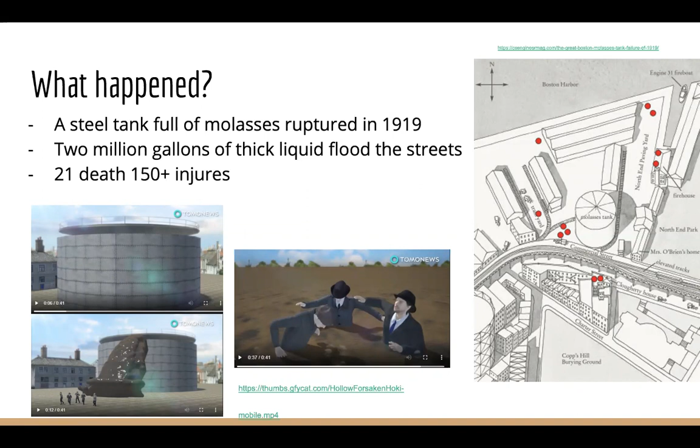Hi, I'm Nishikeet. Our group is covering the case of the disaster that took place in 1919 Boston. A giant tank filled with molasses burst open and more than 2 million gallons of thick liquid poured out like a tsunami. It flooded the streets, crushed buildings, and ended up killing 21 people and injuring 150 more.

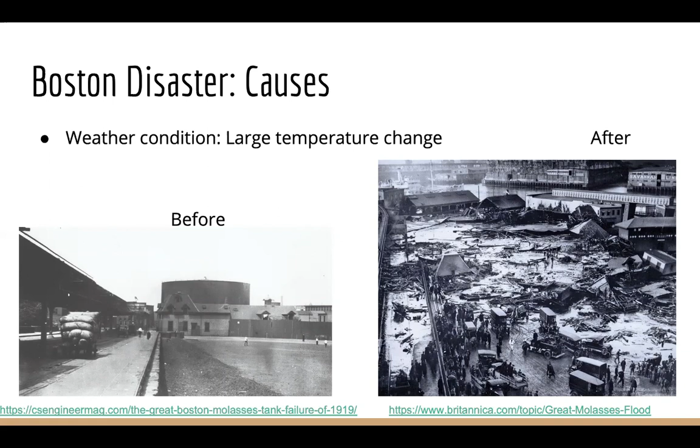The main causes of the Boston disaster were later determined to be the weather conditions, the faulty structure, and the tank design itself. The tank had been filled 29 times, but only 4 times near max capacity. The last fill near max capacity occurred only 2 days prior to failure.

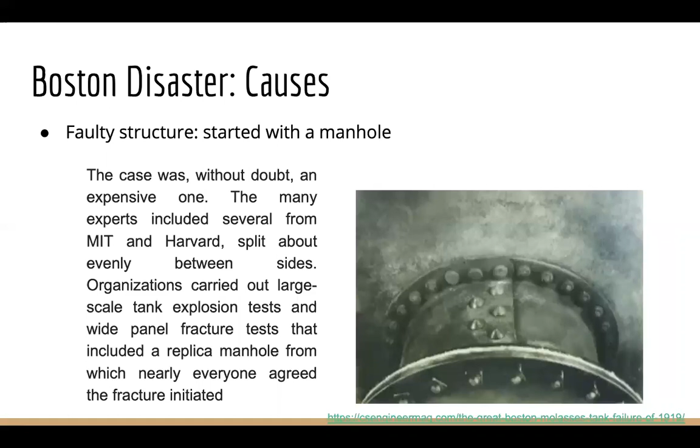We also know the manhole had a really faulty structure. This was proved when large-scale tank explosions were carried out, including a replica manhole, and nearly all of the experts came to the conclusion that the manhole was where the fracture initiated.

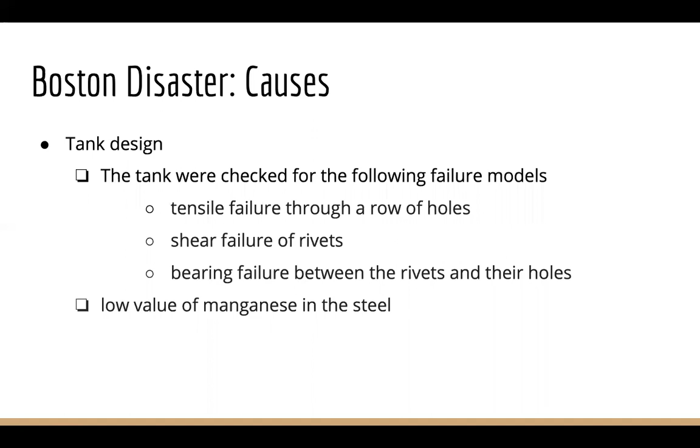The third cause was obviously the tank design itself. The tank design had a lot of flaws and was deemed as one of the biggest causes of the disaster, including tensile failure through a row of holes, shear failure of rivets, and bearing failure between rivets and their holes. It was also found out that the steel had a low value of manganese in it, and hence the quality of steel was obviously not up to par.

Summarizing, the reasons for the failure of the tank were, well, obviously the poorly designed tank itself. Also, when they were testing the tank, they would just fill it up with water to check for leaks. But water and molasses have very different properties. And this was instructed to them by the company treasurer, who is somebody with no engineering background and hence should have no control over how a tank is supposed to be tested.

When they filled up the tank, they saw clear signs of structural defect, but the situation was ignored. When the tank started failing, a laborer brought an actual shard of steel from the tank wall to the company, and the company ignored the issue, which is actually pretty baffling.

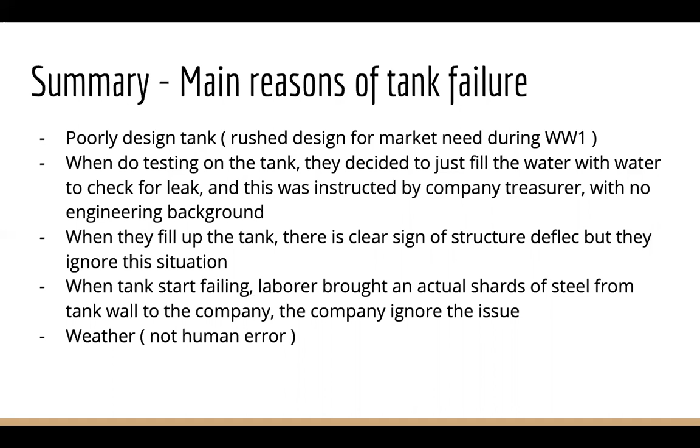As we can see from the causes, there were clearly a plethora of ethical issues involved, both with the engineers who designed and constructed the tank, and also the engineers who were working on inspection and maintenance. The engineers who designed and constructed the tank violated 77.2A and 77.2I. Negligence in public safety is paramount.

While the engineers who were working on inspection and maintenance violated 77.2C, failure to report a situation that may endanger the public, 72.2D, failure to follow the law, 77.2B, failure to safeguard life, and 77.2A, which is again negligence.

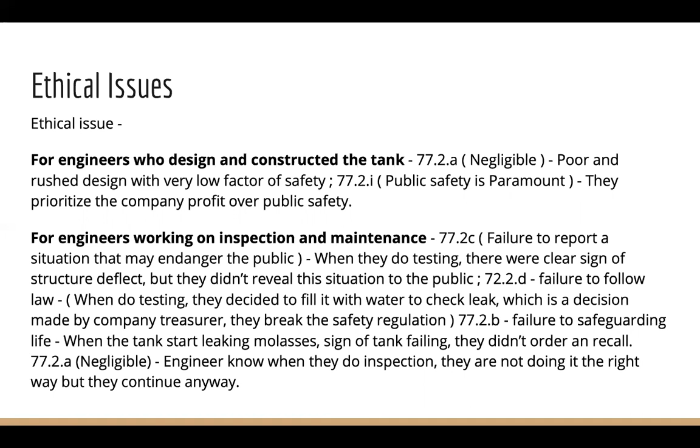So if you were one of these engineers, what could you have done differently to, well, avoid this great disaster, right? One, after realizing the design flaws, you could have just let it be known to the company and let them decide. Or as soon as you find the design flaws, you could just reveal it to the public immediately, even though that has some ethical issues surrounding it.

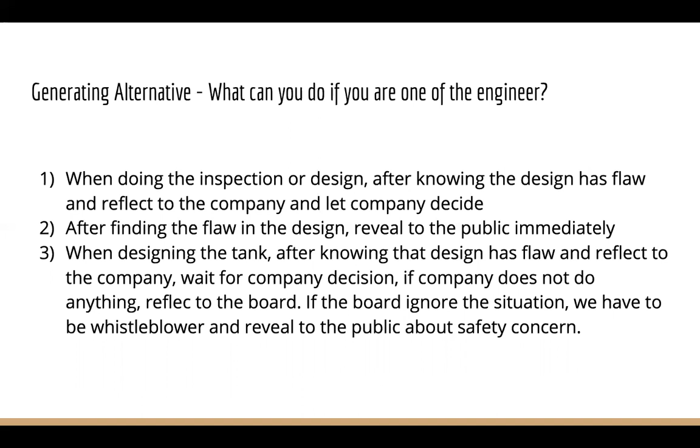Or the best thing to do would be to find the flaws, report it to the company, wait for the company's decision, and if the company does nothing, report it to the board. If even the board ignores the situation, though, you have to be a whistleblower and reveal it to the public for their safety.

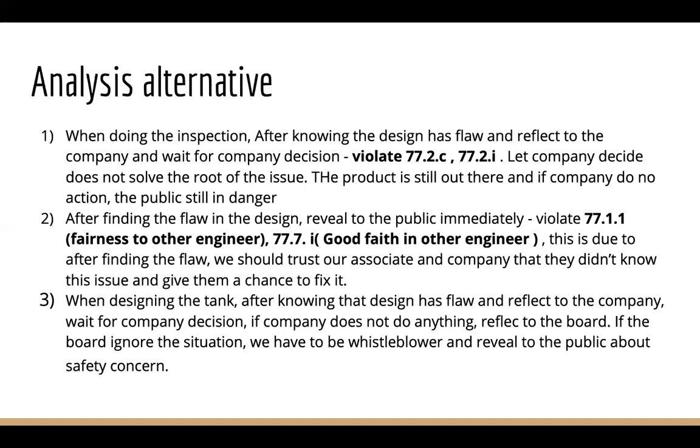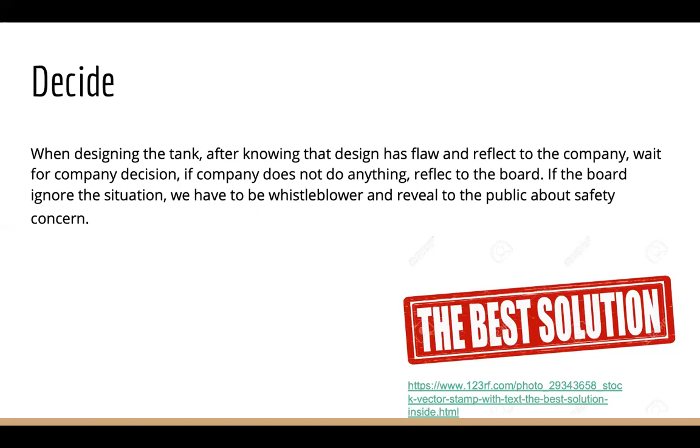But the third one is definitely the best option out there, and hence would be the best solution, as you're not only safeguarding the public but also not breaking any ethical guidelines, and hence should have been the thing carried out by the engineers.

As for legal issues, this was definitely a case of tort law. The United States Industrial Alcohol Company owed a duty of care to the local residents of Boston for the 150 injuries, the countless damage to property, and 21 deaths caused by the incident, and they paid out a lot of money, around 10 million dollars today, considering inflation, to the families of those killed.